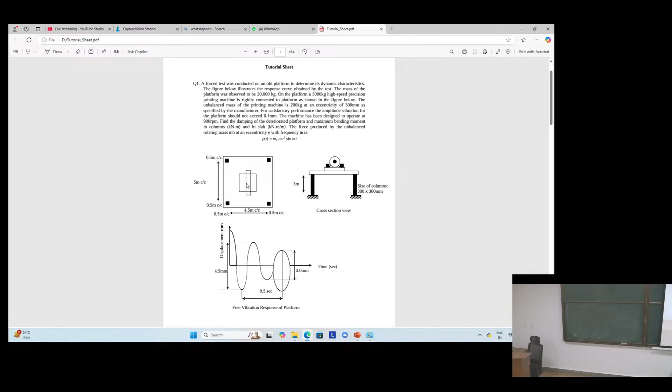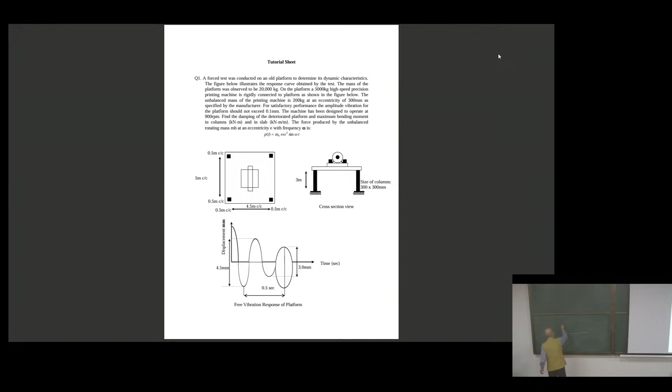This free vibration curve is there. This is a displacement, and this is 3 mm.

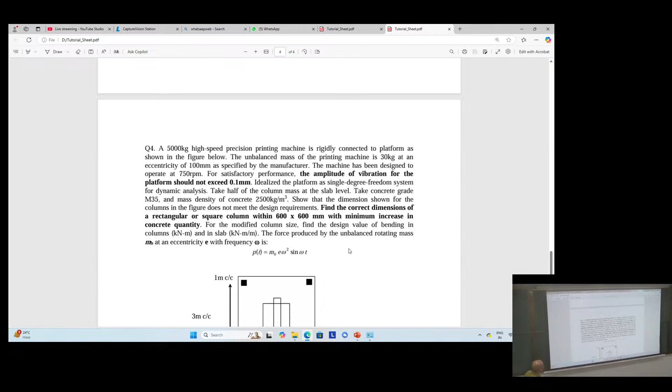Period kitna hai? 0.5 second tha kitna tha?

Okay, so there are little corrections in whatever is shown in this file transparency. Just read the question. Now whatever you've read and studied so far is the force-based concept. This is some sort of a realistic example in which there is a plan.

There are 4 columns. Here a machine is anchored, and the machine has a high speed, 5,000 kg weight. The RPM of the machine is 750 RPM, and the machine has an eccentric mass of 30 kg, and eccentricity is 100 millimeters.

Now when you put the machine into operation, the machine vibrates. A realistic example you've seen is in newspaper printing. Such a machine prints more than 5 lakh newspapers in 1 hour, very fast, so the entire floor vibrates.

So most of the time they keep this type of machine in the basement area, but in many places the machine is mounted on upper floors also. So the design becomes very important, and all vibration transfers. So this is a realistic example.

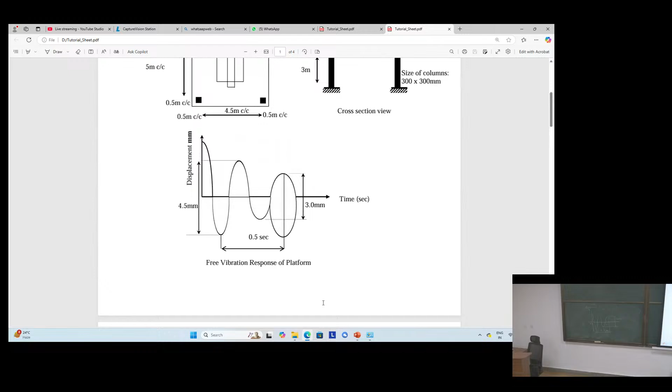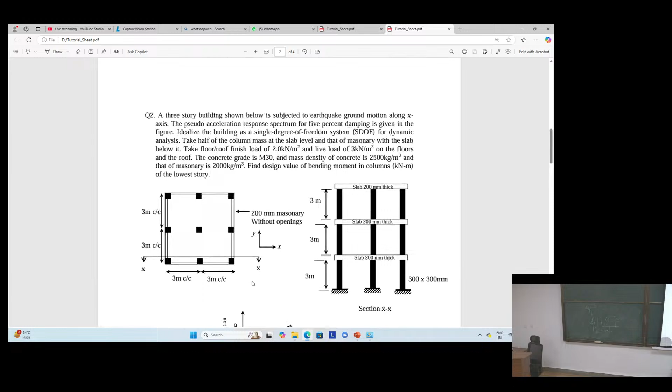This you can see, the column size I made 400. Let me check, I have some changes. Can I use this one? Okay, that's good, that's fantastic, that's very good. So right now column size is 400 by 400.

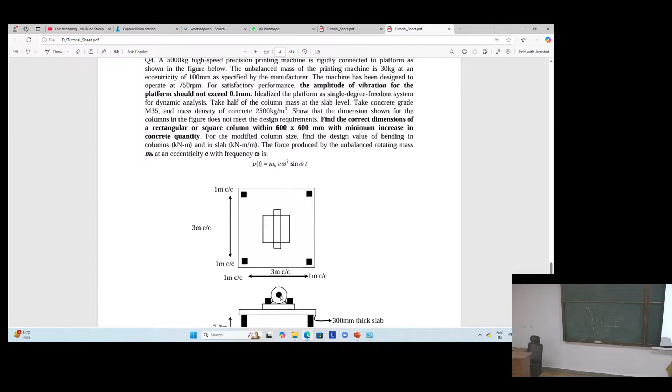This slab thickness, that is the roof of, let's consider you are sitting in this room. This slab is 300 millimeters, mounted on these columns. Column size is 400 by 400 millimeter. The height of each column is 3.3 meters.

There are 4 columns, so I have not made a 3D view, this plan and section is there. Center to center column distance given is 3 meters, and the offset is 1 meter on each side. And this machine is mounted, so this is centrically placed.

So now we have to do the calculation. Because of this eccentric mass, you already been given the information, the equation is given. How much force develops is given by p(t), the time dependent formula is m_b, that is eccentric mass, E is eccentricity, omega is the frequency of the forcing function.

How does sinusoidal force come about? This is mechanics, simple mechanics. If you want, don't go too much into that side. Just for your understanding as a student, it is like this one.

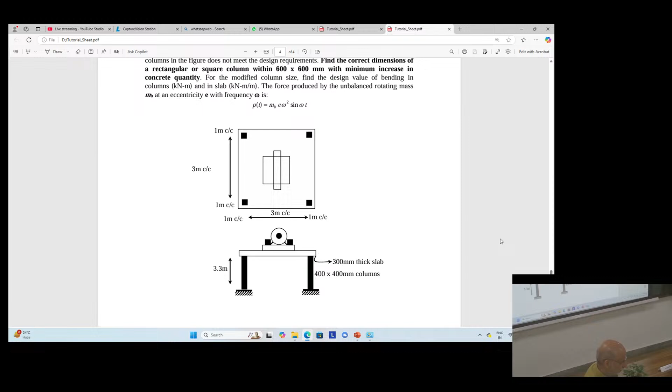You can do it independently, you can do it in a group, but if you do it independently, will you try to understand? It is not an exam, so you can easily do it.

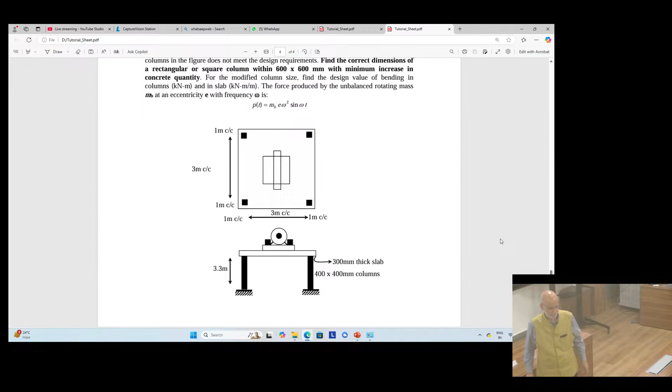Just think 2 minutes and then let me know how you proceed. Your calculation should be neat and clean. Don't do it in an absurd way. You are an engineer, so you have to produce a design which is absolutely neat and clean. Your calculation should be perfect, very systematic.

See, what is the target for this? What is the target parameter? Bending moment, bending moment you have to calculate. Mechanical model already shown to you, so you must have got some idea. The stiffness is the vertical stiffness of the column. So bending moment, what is the need? How will it deflect?

The vertical component of this eccentric mass will create a vibration in the system. The horizontal component will cancel out. So that part also need not be thought about, it's just mechanics, how it works. That's all, but you have been given the equation straightaway, so you can calculate the eccentric force.

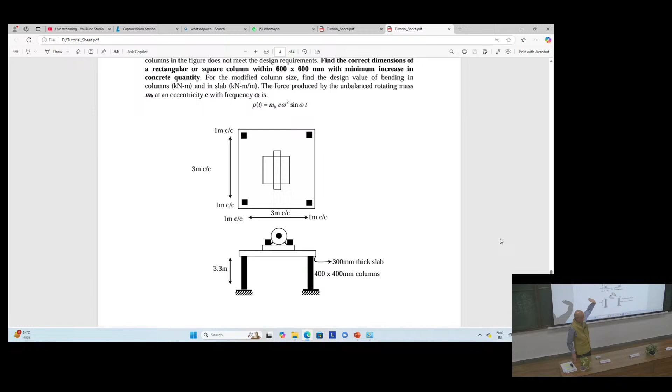First thing is omega square. Omega is what? Forcing frequency, forcing frequency. And RPM of the machine is given, so you can calculate omega. Just do that, how do you calculate?

From RPM, how do you calculate omega? Just say it loudly. Anybody else? RPM divided by 60, yes, that will give your frequency. Just go ahead and calculate.

Did you get it? First question. Okay. First thing, you calculate the forcing frequency, omega.

Now what you have to calculate ultimately is bending moment. What is the equation for bending moment that you need? Yes, anybody? To calculate bending moment, what is needed?

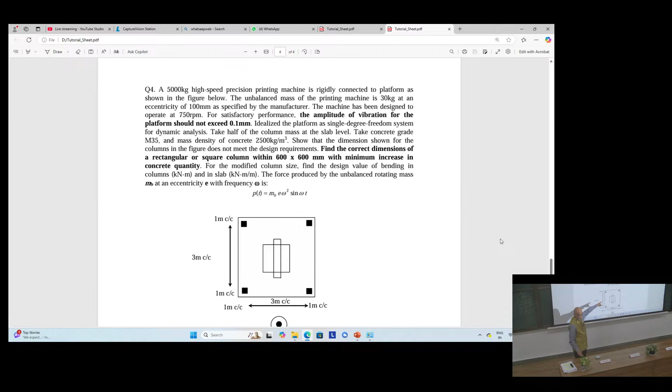Now eccentricity is given, 100 millimeters. Eccentric mass is given. Now you need the maximum force, because your equation is...

Okay, you have done it. And you can write this, if sinusoidal force is there. Okay, and now this force is given. So this is the amplitude part.

So how much force do you get? If you go, this is kg, meter, radian per second, you get force in newtons.

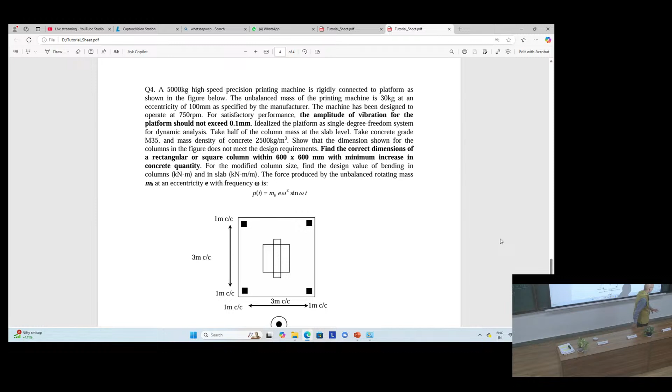Transmissibility. Transmissibility will come in the picture when force is transferred either from ground to structure or structure to the ground. Now here there is no transmissibility, neither are we taking force to the ground, we are not designing a foundation, nor is oscillation coming from the ground. So that is not there.

To this one you have gone? P0 you have calculated, okay.

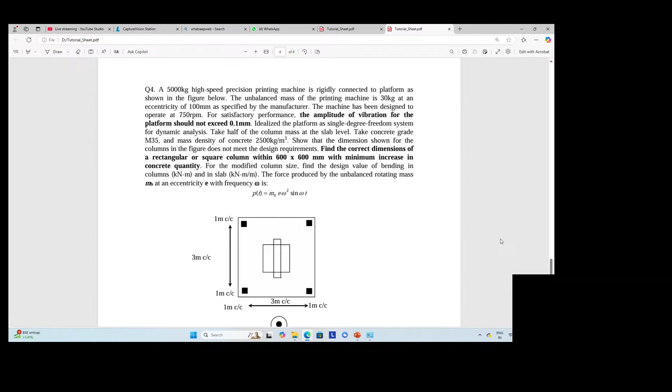Okay guys, I give an idea, hint to you is that you need a K. Dimension of column is given to you. Okay, K is how much? Yes, very good.

Okay, so height of column is given to you. How much is it? Yes.

Now FCK is given, concrete grade is given, M35. Okay, so now you calculate E, substitute, so you get E. Okay, now to begin with, I is given, the column is 400 by 400, okay?

600. It's 600 by 600. No. This is when revision comes. Initially you are given 400, okay.

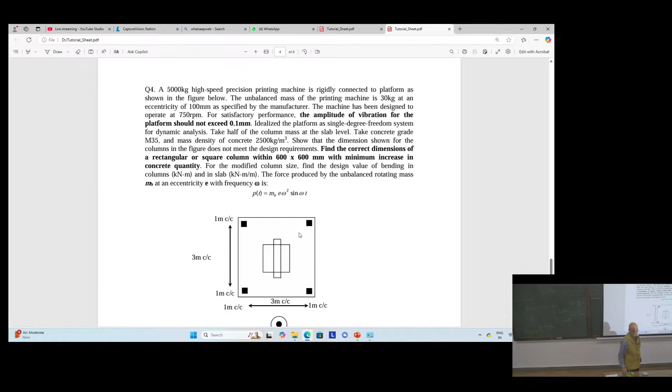So now can you calculate this K quickly? Got it? You reached K? Yes. Okay, very good. Now once you reach K, you can calculate natural frequency.

Now task is to calculate M. Now M will constitute what? The machine weight. Machine weight is there, okay. Now, as this Arijit mentioned earlier also, the column weight is there, and weight of the mass of this one.

So density of concrete is given, thickness is given, size of platform is given, so you can calculate how much weight of this one. So this weight is given to you, this you can calculate it. Now columns, how many columns are there? 4 columns.

Now what he has done is, if you can recall, similar, not exactly, but a typical problem where what we did is, he took half of the mass of the column to the top. So that is why standard practice of this is, why you take half? Anybody idea? No, okay, we'll talk somewhere.

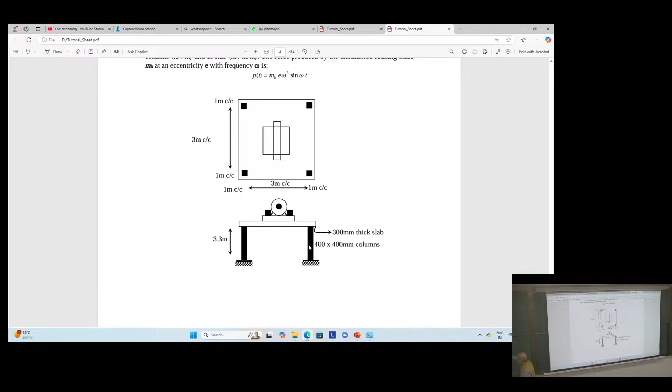So you have calculated beta, you know the xi, P0 you know, K you have calculated, put the dimension appropriately and calculate the delta.

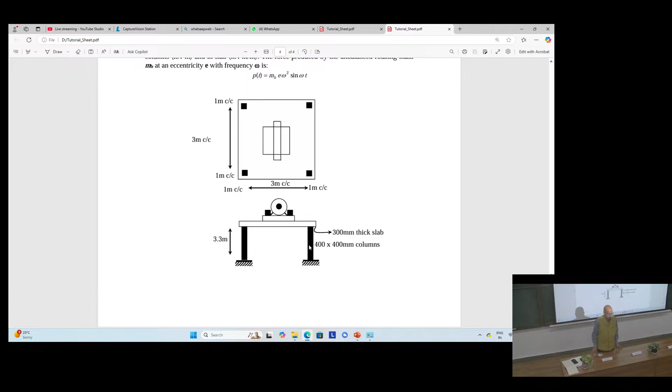See how much dimension you have taken it? 5 by 5. Perfect.

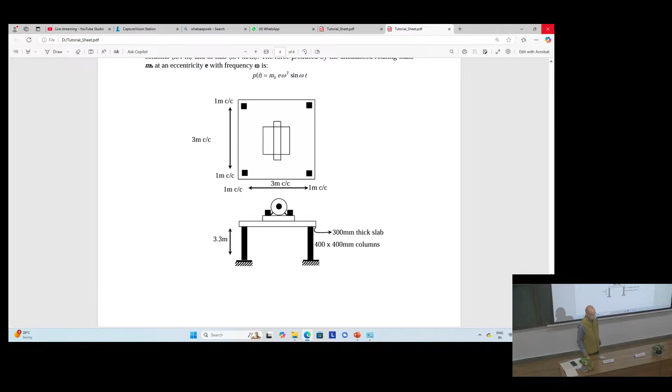See, density of concrete is given.

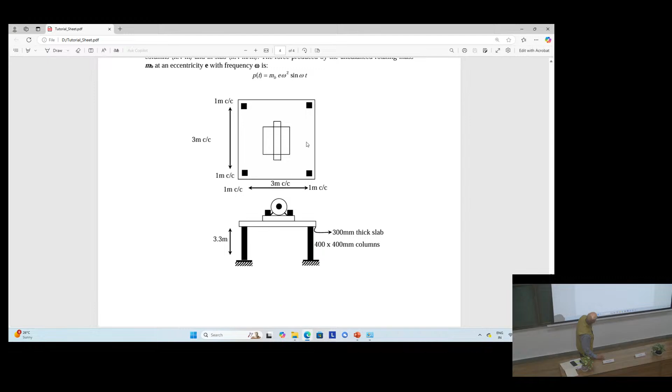See, density of concrete is given, right? So you have to be clear.

5 by 5. This is 0.3 m thickness. Density multiplied, you get the mass of this roof. Plus 5,000, you add it.

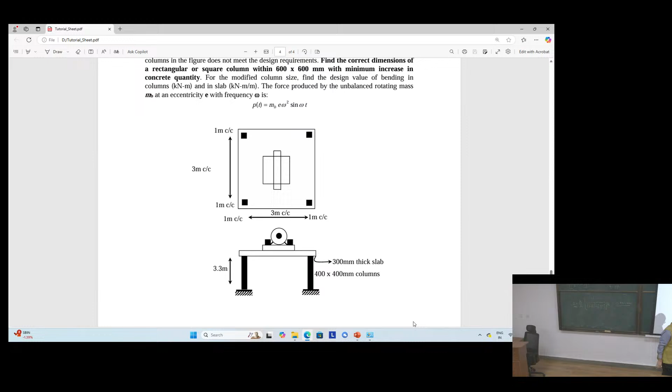If damping of concrete is not given at any time, you can assume it's 5%. If it is steel, you can assume it's 2%.

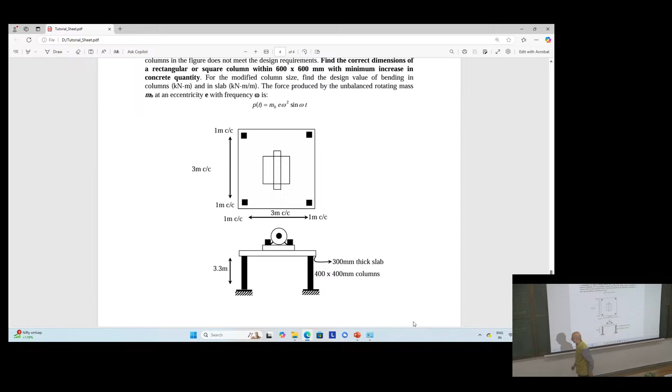What about any other answer?

Point 923. 923, okay, doesn't matter, this is not going to influence much. Multiplied it becomes 0.923.

So this xi you substitute, it becomes 0.05 here. Beta as usual, so you calculate. 0.442.

Is 390. Instead of 0.923, 0.233, 0.233. So this is your third answer.

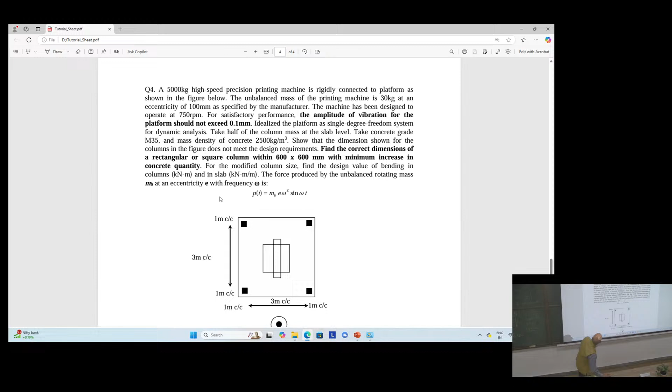This should be less than 0.1 mm, because the range which has been given is 0.1 mm. So in any case, this platform's vibration should not exceed 0.1 mm.

So 0.233, 0.2, this is the first answer. Anybody else?

Do it a little fast so that we can attempt one more problem at least before the lunch break.

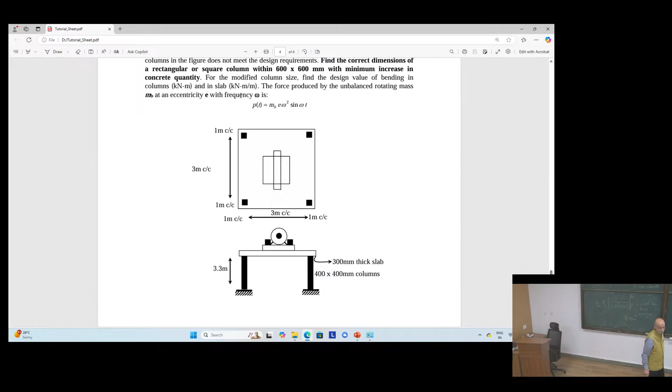Yeah? Finally? Okay. Anybody one answer, then we one by one will go and check it. Where is the difference? Anybody from this side, one answer. Quickly. That is the correct value.

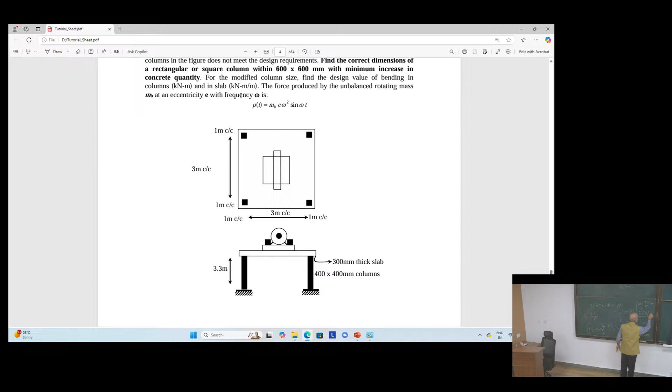Okay, let's come here before. Okay, how much this one is? Speak loudly. 78.5. This one? Yes, 78 point? Yes, from this side? Clear? Yes, everybody has 78.5? Okay. This is radian per second. Okay, great.

Now, what about this mass? Let's come to the mass. 26390... 264. Let's do it very systematically, otherwise everybody will get a different answer. Now this M consists of...

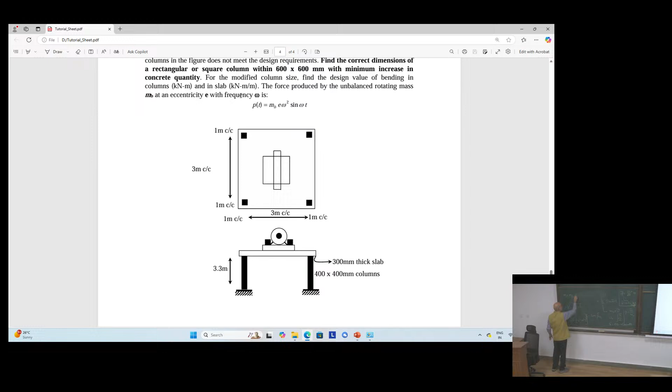Make it separate. Slab, how much it is? 18750 kg. This is clear for everybody? Has this answer? Yes, okay.

Printing, this is given. So 5,000, you need not to do anything. Plus column. 2640. Everybody's answer is this? Yes, column? Okay, so that's great. So the final is how much? 26390. Everybody has got this answer? Okay, great.

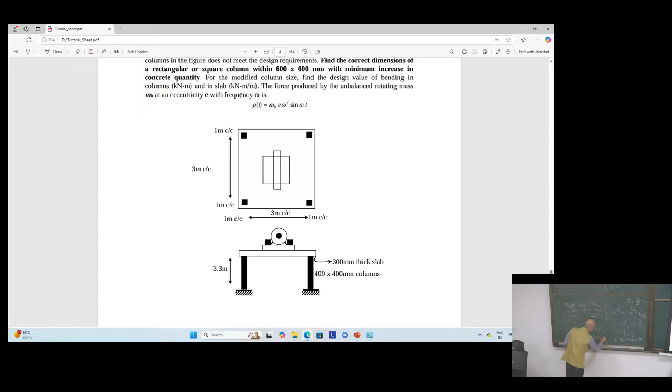Now come here. E is how much? 29580.4. You got it? Everybody has this answer? Hmm? Okay, great.

Now I, 1/12, this you keep it in dimension, you should be keeping consider. I 0.4, so writing is easy, I did it, but you can do it in mm. So how much this I is, let me know, in mm. Yes, let me speak. 0.00213 meter to the power 4.

So you convert into the mm. How much? 10 to the power? 10? Simple. How much? 10 to the power 9. Everybody's answer? All? Now we substitute. This is 3.3 meter.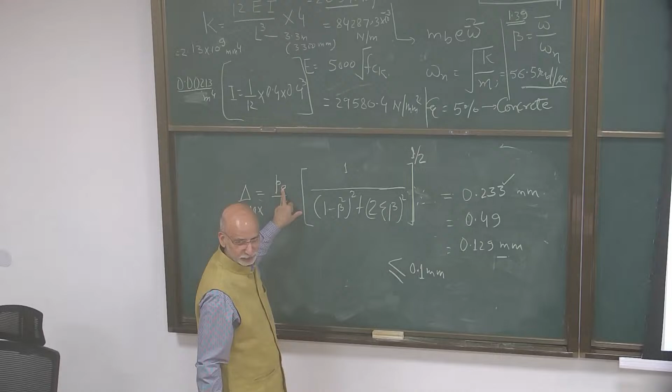So this P0 is known to you, K known to you, this you substitute here and take a square root of this one. 0.233, everybody? So remaining 2 I can remove? Okay.

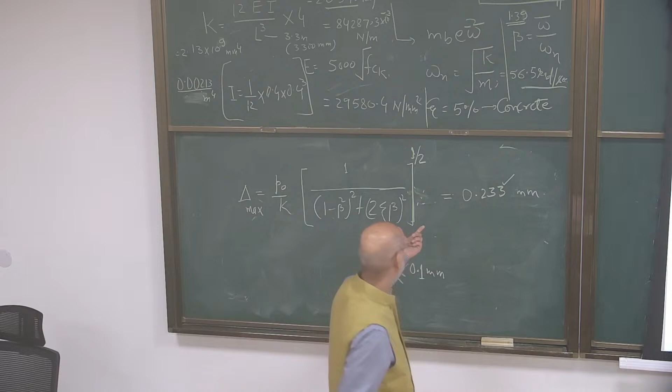So what happens finally? Your limit is 0.1 mm, so maximum deformation that can take place is 0.1 mm. Okay, but you are getting 0.23. So what will happen? It is unsafe.

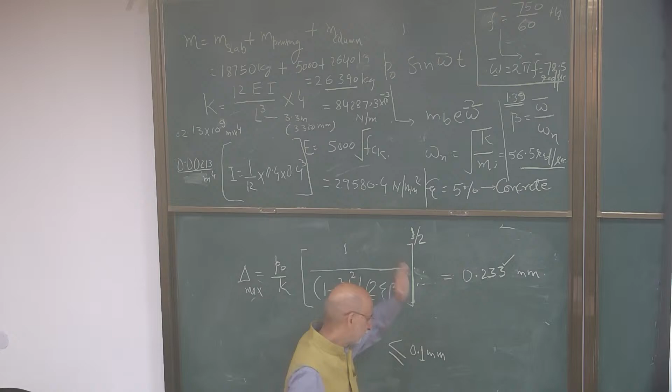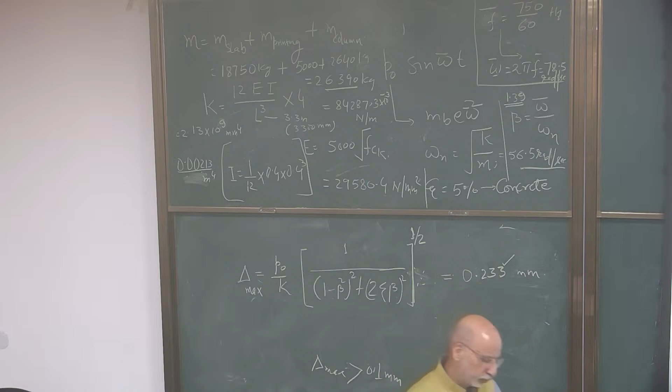So that means this platform is not going to survive. Means what? You get a printing which will be hazy. Because the limit is 0.1, so you get a hazy printing. So that means you have to revise it. What to do is, you have to bring the limit to 0.1.

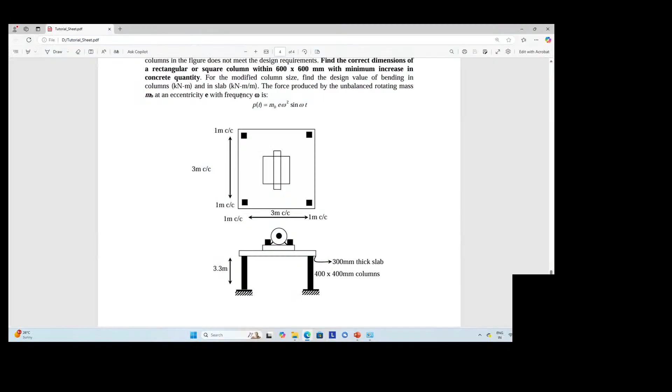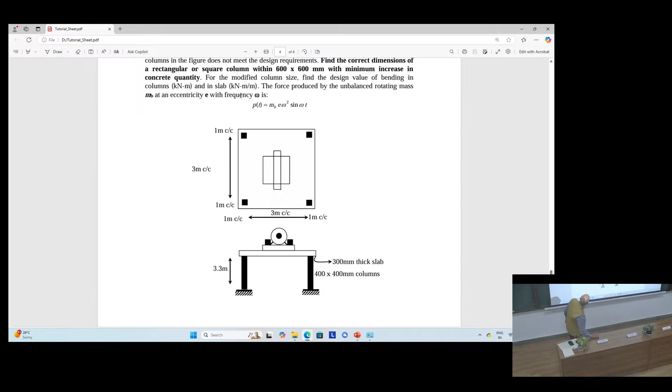That is your target. So in order to have this platform function for which it has been designed, what to do is, what is the remedial solution? What is in your hand? So you cannot change this platform, this roof you cannot, it has to be fixed. Only thing in your hand is the column. That is why in the question itself it was written that the maximum you can have is 600 by 600.

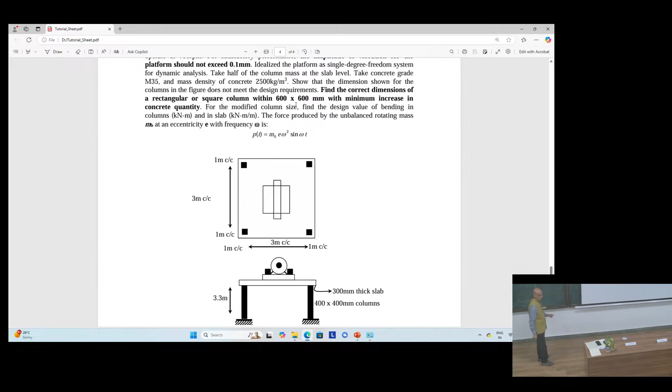Okay, so let's put... so don't go to, so maximum what you will be doing it. So do it very systematically.

You start from here. This is known to you. This is the forcing frequency. The machine is specified, so you cannot change it. Now your hand is that you can change this one, the natural frequency, which depends upon K and M. M is largely fixed because maximum, that is why I wrote the mass separately. So if you know how much mass of the column is in percentage of total, you see how much contribution is there, so from there you can make out.

So largely the contribution is from the stiffness. Okay, so and you, as you know, this is so largely fixed. This you can change it, which is in your hand.

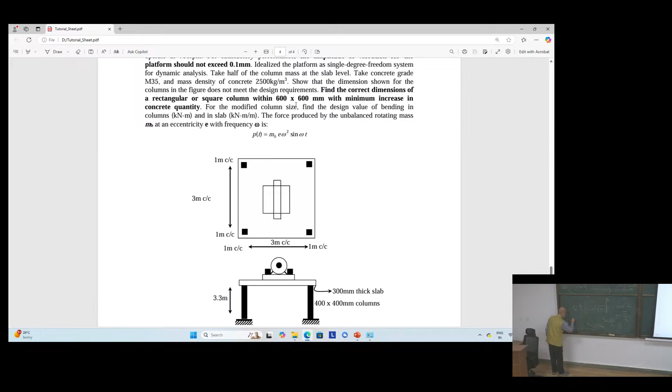Okay, this is 1. This ratio is 1, the frequency ratio is 1. Okay, now this starts almost close to 1. Right now you are at 1.4, right? So you are somewhere here. The frequency is 1.39, so you are on the right hand side. Okay, if from here you move towards the left side, if you look at this, your maximum can reach is 1. Okay, so one iteration possible is, let's go a little away from this side. Okay, and so come somewhere here.

So you can assume it takes a certain new value. Let's assume it is 1.6. Why are you assuming? Because look at the plot - this is an iterative process. So you get this new value of omega n.

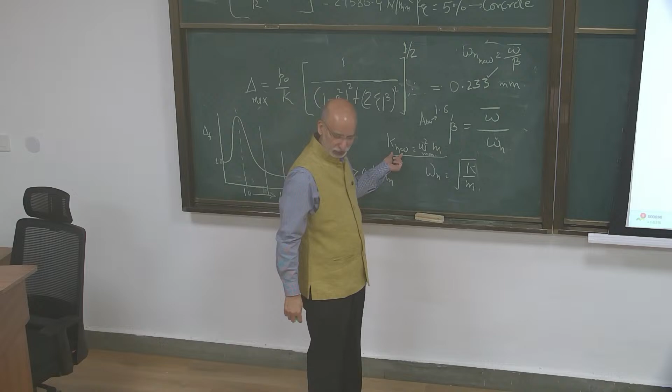So this new value, you substitute - mass is fixed, almost not varying. So you get a new value of stiffness. This stiffness consists of what? 1.12, 48 EI upon L cube. E is fixed, L is fixed, so I will change, so you get a new value of I. And it's a square column.

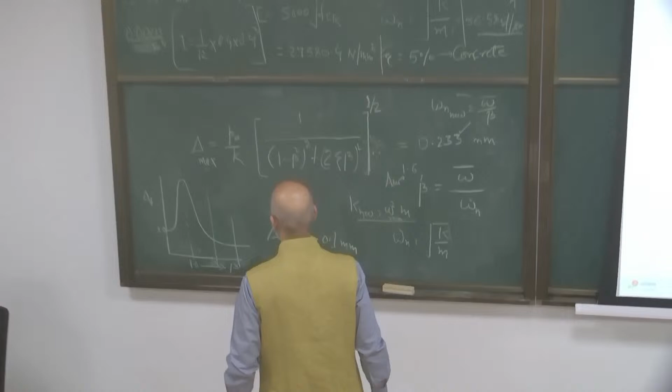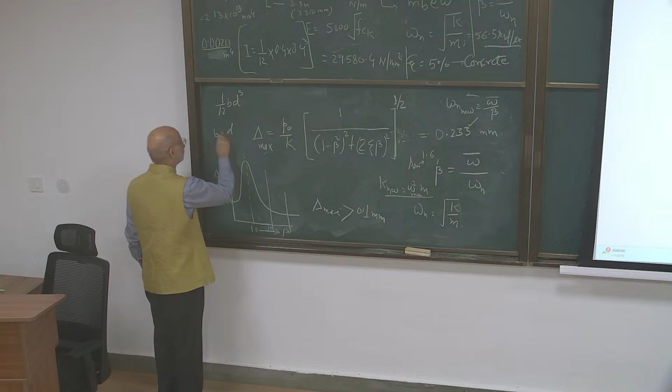So for a square column, you know 1/12 BD cube. So if B and D are the same, you can calculate the new value of B. That will give you the new size of the column you need to have.

But this is a very crude way of doing things. The best way, as an engineer, is to write a few lines of program in an Excel sheet and put in the values, because the upper limit has been fixed. So you put the dimensions B and D differently and try to match with the new value of I.

So let's start from 250 and vary the other dimension, and write an Excel sheet. I have more than 1,000 results varying B and D. I'll show later - just make it and see how much. That will be the interesting part. Write a few lines of Excel program, change B and D, and come out with the most optimized design of the column.

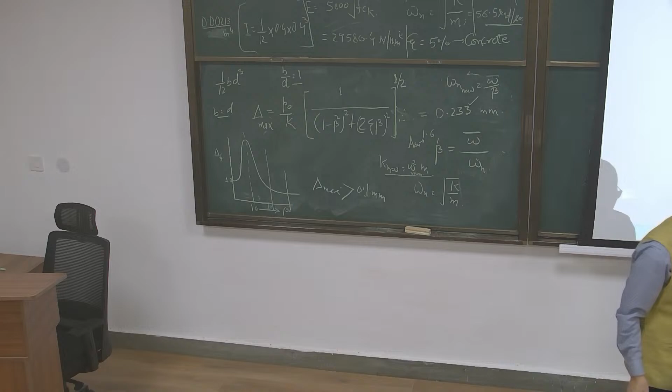But make sure the dimension should not go below 300 in each case, at least - you can have other upper dimensions. So that is the broad idea, you can play with those two numbers. That is why what we normally do is take some ratio - that's a better way of doing it, and then iterate. That makes handling easier.

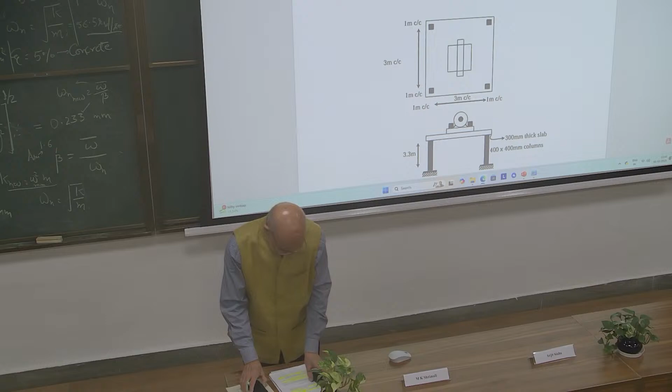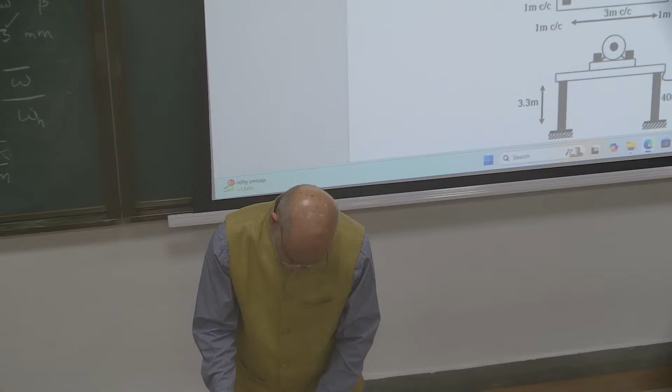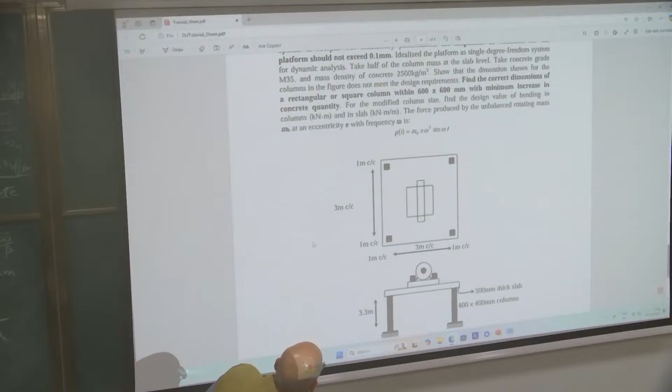So will you calculate the answer? No - can we attempt one more problem? Yeah, we can. Let's say a smaller problem, which we can do quickly out of these four problems.

Now, how early you get your lunch depends on how fast you do it. This is connected with the last problem, so it's easy to move on. A printing machine, same way, is mounted on this platform, and the unbalanced mass is 300 kg - now we increase it - and eccentricity is 100 millimeters as usual. The machine is designed to operate at 900 RPM, so it's a very fast machine. The material properties of the platform - now this is an old platform which is existing and you don't know anything about it. No design drawing is available to you.

Nothing is known, so what we do is conduct a hammer test. There's a way of doing it - just pull it. So static displacement of 5, a lateral force of 45 kilonewton is required. That means 45 kilonewton is how many tons? 4.5. So that much you pull it, the platform deflects by this, so you get some information. Due to non-availability of precise equipment, only selected information can be obtained from the vibration curve, but some of the things you want can still be used from the same curve we have used.

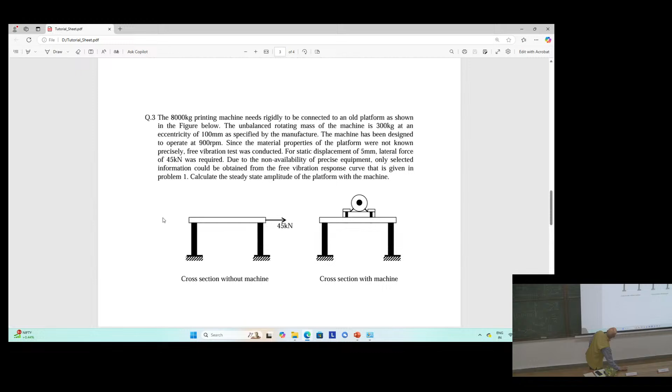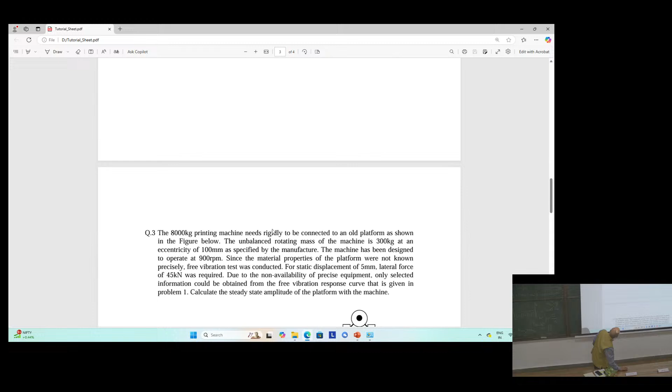Same curve - the curve is the same. This is only half - by pulling, this has happened, but this is only half the curve. So calculate the steady state - the answer is very simple here, you just have to calculate it. This is a steady state response, because there are two solutions: steady state and transient. The transient will die out after some time; the steady state remains, which is the situation you need to handle.

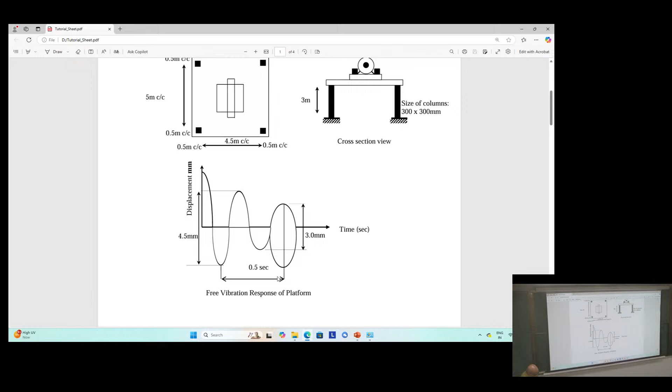So nothing is known to you. So what you need to do is to begin with, you can assume it, because in the question itself it's written.

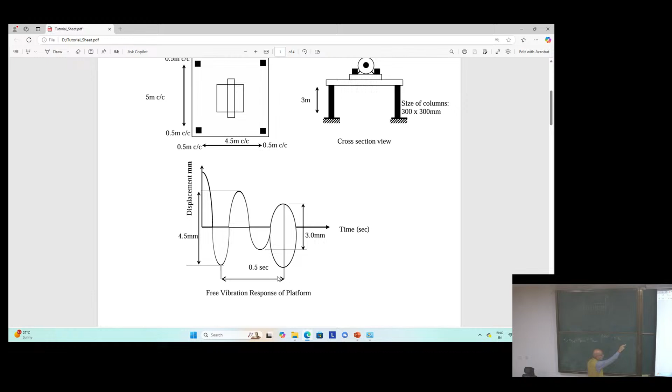So material properties of the platform are not known precisely. No concrete grade, nothing is there. It is an old existing platform, the building is there.

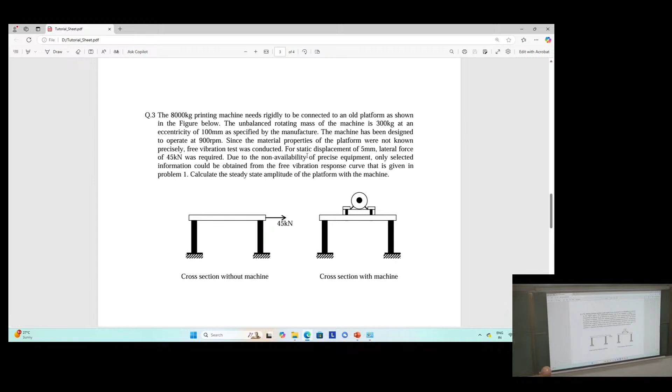And why did I take this approximation? Because xi is 5%. If you take 5%, square root of 1 minus xi squared, that is 1 minus 0.0025. How much is that? Very small, that is why this assumption is valid. Okay?

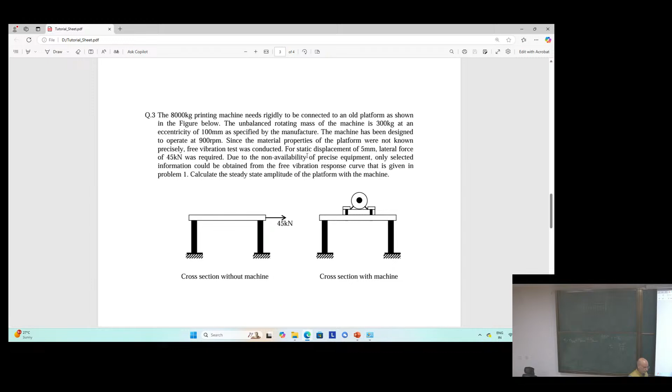So now if this is valid, then from cycle to cycle, 1.5 cycle, the period is 0.5. So divide by this, so you get how much? See this 1.5 cycle, 0.5. So that is what I said.

No one can get a precise value, only selected information can be drawn from the response curve which is given. So how much is it? 0.33. Okay.

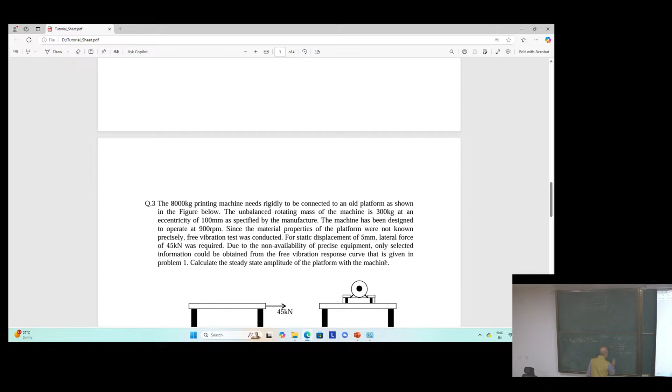So you calculate the natural frequency. Calculate. 18 point?

Now I will jump a little higher quickly. If you can remember the logarithmic decrement which you have done, either you can derive it or you can remember it.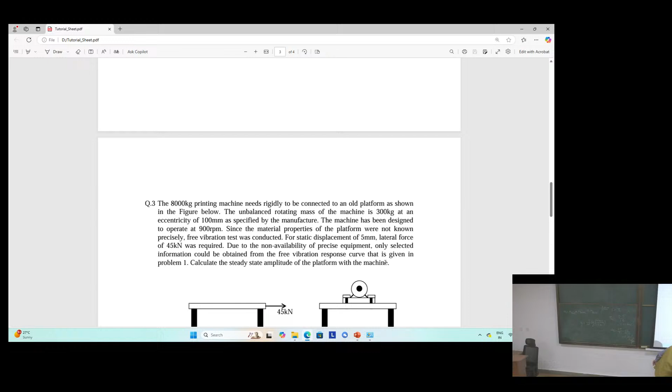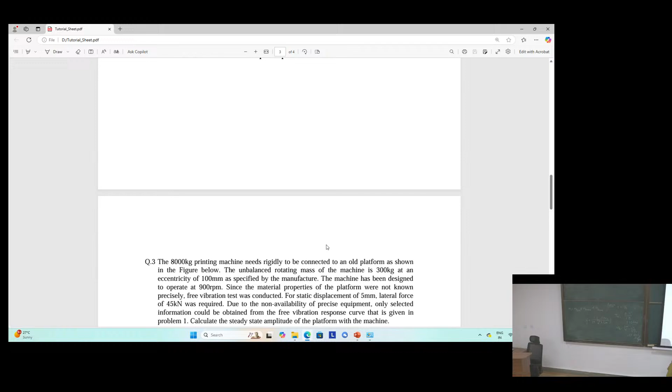Okay, so now you come here. First is 4.5, then this comes to 3. It's 4.5 by 3. So use 4.5 by 3 here.

So let me know how much it is. Yeah, quickly do it. Point. Percentage or absolute value?

Okay, so you reach your damping.

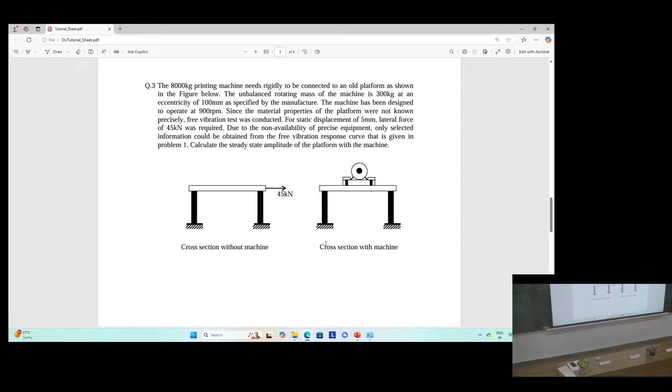Delta is 0.208, point mm. How much? 0.208. 0.014? Oh, different answer. 0.208, correct, na? Yes sir. Anybody else?

What, everybody got the same answer or different?

No, they are very fast, everything is done. You have to crunch the data only, simply. What, same answer? Okay, same?

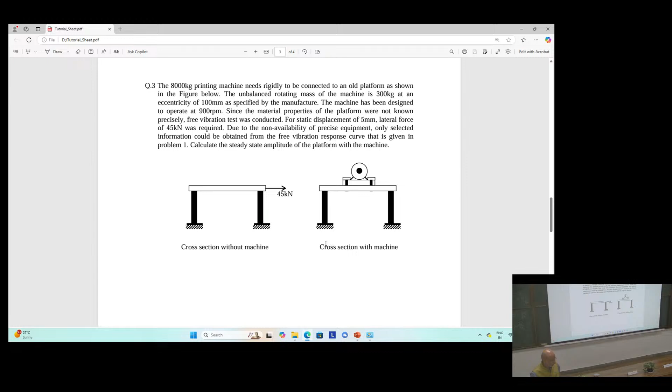Okay good, so now you can stop here. So how interesting is it? Let me know. Did you get something new, feeling something? Or is it a regular one? Something exciting? Okay good, okay.